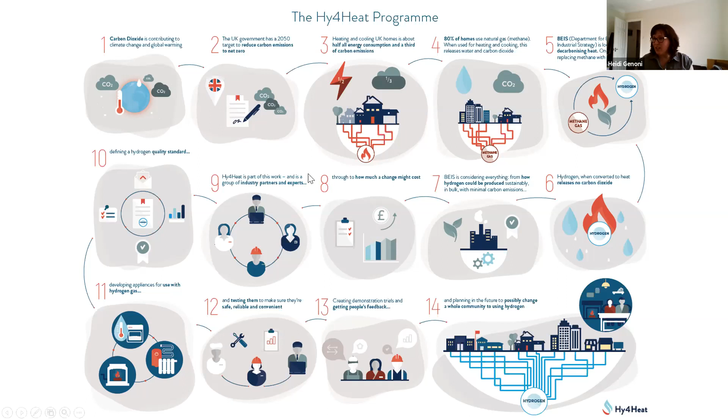So Hy4Heat has a number of different, if I can change onto the next slide. Yeah, so just by way of very brief overview, there's a number of different work packages within the Hy4Heat programme. The programme started in earnest in 2018, and since then we've made fantastic progress with the support of industry. There are a number of different work packages, but to cover the areas broadly, there's development that we're undertaking in terms of developing hydrogen standards.

There's work that's been undertaken in terms of developing all the different appliances that may be needed at end use. And then also, very importantly and critically, is the development of the evidence to support the safety case before we move into demonstrations and then potential future community trials. So just touching on a few of those areas to give you an insight into some of the progress that we've been making. We do have a website for the programme and we provide regular updates, so I would encourage anyone who's not had a look at that, please do have a look.

However, to touch on a few areas, in terms of standards that are being developed, IGEM, which is the Institution of Gas Engineers and Managers, have been developing standards for use with hydrogen, very much building on existing standards that already exist. Likewise, BSI have developed something called PAS 4444, which effectively provides guidance for how hydrogen appliances need to be tested and certified to ensure that they are safe for use in our homes of the future.

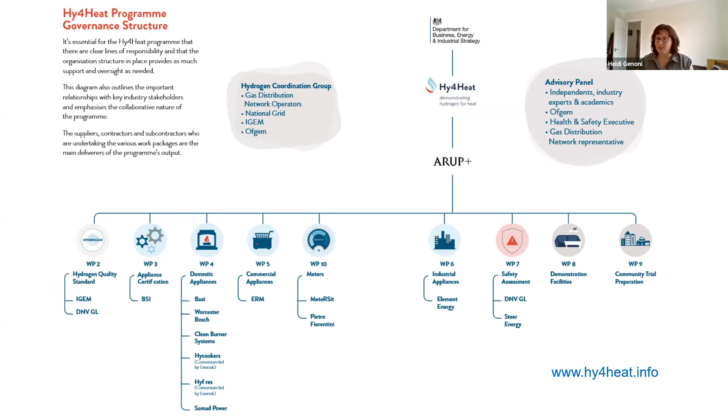So hopefully that's a very brief update, but I thought it would be worthwhile taking recognition of the important role that industry and a number of different organisations have had to play in the whole collaboration approach to make this programme successful. As you can see here, there is a huge number of different organisations working on many different aspects of this programme. And this is all to provide the evidence to be able to move forward with 100% hydrogen in the homes. So hopefully that gives you a brief update of some of the work that's being undertaken in the Hy4Heat programme, and more than happy to answer questions later.

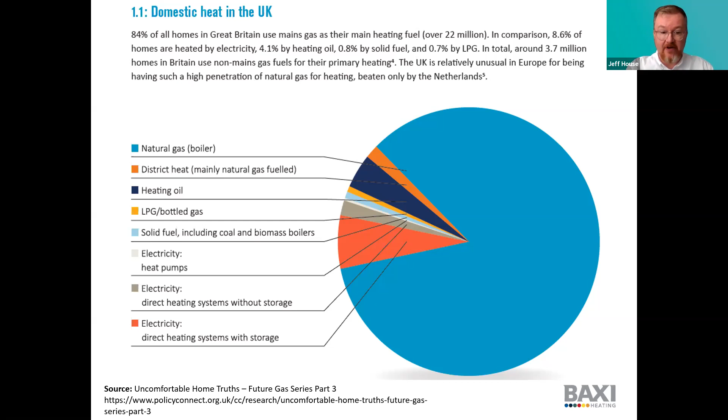So we at group level recognised that hydrogen has a lot of interest from a number of mainly Western and Northern European countries at the moment. The colder climates are more interested in it because you've got a larger market for heat there. And we started to invest in exploratory R&D work to build towards a prototype appliance a few years back now. That's resulted in effectively a world-leading demonstration in the Netherlands that was installed in 2018. We had a working hydrogen boiler installed into a small block of apartments in Rozenburg, which is fueled by green hydrogen on site. There's an electrolysis plant on site, and it really is an encouraging and cutting-edge demonstration of technology.

So in the UK business, we again saw the potential that projects such as H21 from Northern Gas Networks are starting to talk about the potential for mass conversion, and we had other projects from other gas networks in the early stages of development.

So we thought, great, this is potentially something we need to be involved in, and could offer some really innovative ways in which to deploy some of our R&D resource and our work. So the Hy4Heat program came along at exactly the right time. We were thinking about commercializing or bringing this technology across to the UK, and then developing it further to fit the UK market.

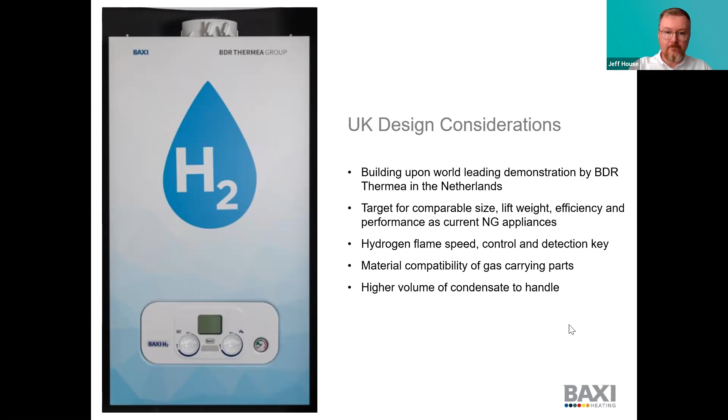So we're at the position now where we have prototype products for the Hy4Heat program ready to go. We were able to meet the design intent, so it is the same size as one of our current natural gas condensing boilers, so it will readily fit into an existing house without any real issues. Weight is always a concern in terms of lift weight and handling. Again, it's very similar, so fairly low weight.

And from a performance point of view, we're hitting the sort of combustion efficiencies and flow temperatures that you would expect. So again, it can be slotted into an existing UK household heating system without having to change radiators or change any of the hydraulics.

Importantly, we have a combination boiler and a system boiler. So the vast majority of UK boiler sales today are combis, so you get heat and hot water from one box. Again, we've got a solution which effectively just replaces that with a hydrogen version. So again, you don't need to find room for a hot water cylinder, which is one of the other drawbacks that we do see with other retrofit alternatives for net zero.

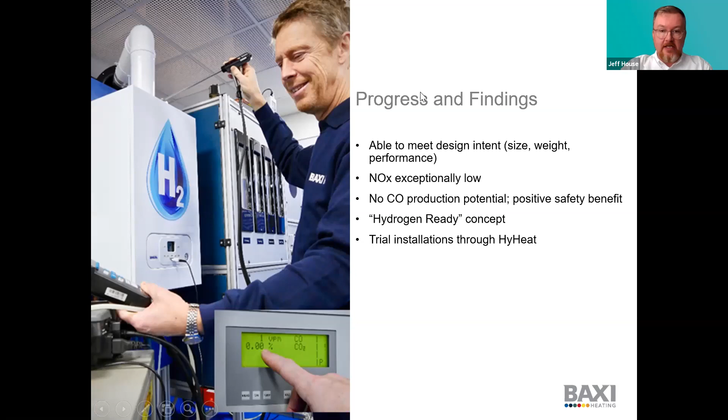And again, Heidi mentioned through Hy4Heat, we're moving into the trial phase fairly shortly. Obviously, to an extent, that's been pegged back by the COVID situation, but we're hopeful we'll see that start to happen fairly quickly now. So that is essentially everything I wanted to run through, Andrew. So happy to move through to Q&A.

Thanks very much, Jeff. Well, thanks to everybody. There are a few questions coming up because I think people are fascinated to know the whole production process and the schedule. So questions around that. So feel free, whichever one of you wants to answer this when I throw them all out.

Here we go. A few questions about the renewability. Is the way that you're going to produce the hydrogen renewable? There's a few worries about that, and also the amount of energy that it might take to produce hydrogen. I guess there's no fixed actual production strategy yet, is there? It's just looking at several at the moment. Yeah. So go on, Heidi, you go first. Okay.

So from that, I mean, people are entirely right. There's two main ways that hydrogen can be developed at the moment. It's either blue hydrogen, which is effectively using fossil fuels and carbon capture and storage to capture the carbon and put it back in the ground, or there is green hydrogen, which is effectively using renewable energies and electrolyzers and water to create the hydrogen.

Obviously, there's a preference towards green hydrogen, and I think there's big moves in the industry that that will be the end state that the energy system is aiming for. But there's got to be recognition that there's a cost associated with green hydrogen at this moment in time. Not to say that that won't change in the future. So at this moment in time, it's considered that blue hydrogen is possibly cheaper.

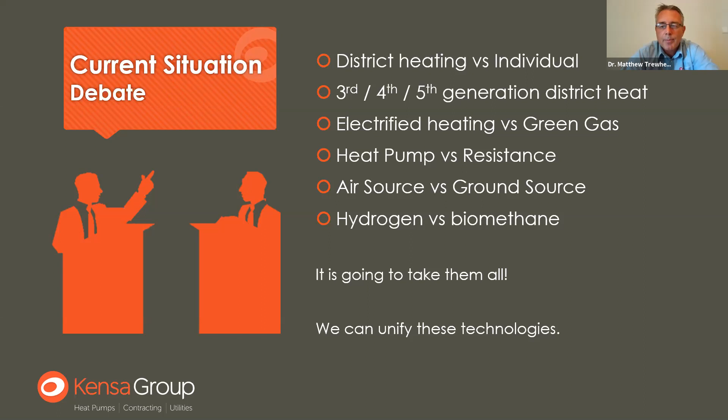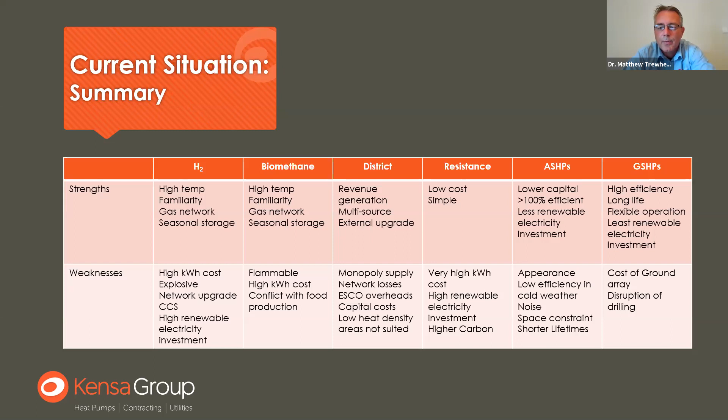One thing we'd contend is you are going to need all of it in some way, shape or form. We're going to look at a possible way that most or all of these technologies can actually be unified into one concept. So the concept we'd like to introduce and chat about is - that's a quick summary of the arguments. Please don't take this as a comprehensive list of all the arguments for strengths and weaknesses. I'm sure everybody listening will disagree with at least one of those, and if I'm honest, I don't agree with all of them either, but that's a flavour of the types of arguments, debates that are going on right now.

If we just look at hydrogen and ground source, for instance, to get it relevant to what we're going to talk about in a moment. Ground source is excellent at making the best of electricity generating sources, in particular renewable electricity. So for every unit of renewable electricity that's produced, you get to leverage another 2 or 3 units of heat out of the ground, so that you really maximize all of that efficiency and therefore lower the cost, both for building the electricity generating capability and for the cost of purchasing it.

Hydrogen, you don't get quite as much bang for your buck if you decide to make your hydrogen using renewable electricity. By the time you've created it, stored it, transported it, and then burnt it in a boiler, you get 50 to 60% of the energy. So in that sense, it's less efficient. On the plus side, it's very, very flexible. Once you've created it, you can store it, leave it there, and decide to use it whenever and wherever you like. So it's very flexible in that regard. And the system we're going to look at now combines the best of both of those things.

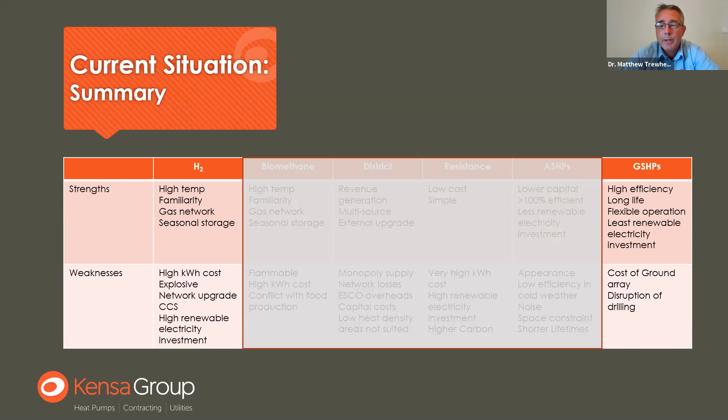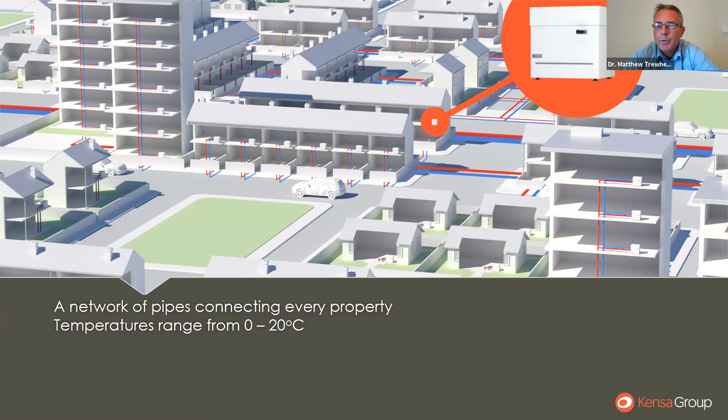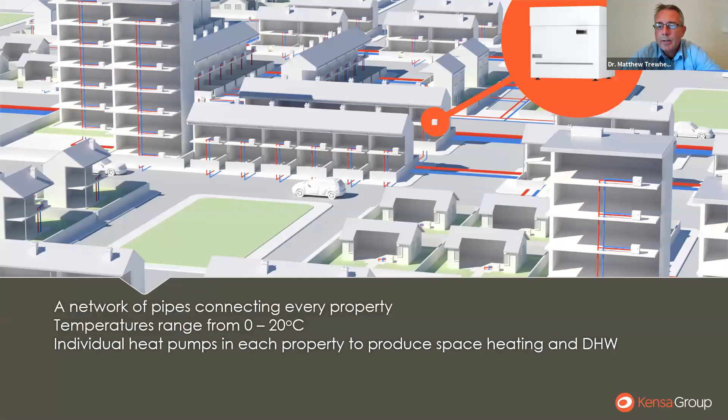So the foundation for this is a type of district heating. It's called an ambient temperature network, for heating and cooling. What that looks like is a series of pipes running around your district, town, or city streets, connecting every property together, and that circulates a working fluid that ranges between 0 and 20 Celsius. The ambient temperature is similar to the ground that it's circulating in. You then have a heat pump in each property that either upgrades that energy to produce space heating and domestic hot water, or chills it down to produce cooling.

And you can take passive and active cooling from the same network. So there are some cooling applications where the network's already at the right temperature and you can use it directly without a heat pump. For more intensive operations, you use a heat pump, take the cold out of it, and put the heat back in. The nice thing about this sort of network is all the waste products - when you're making heat from the network, your waste product is cold, and when you're producing cooling, your waste product is heat - go back into the network and recirculate it around to act as a source for the other devices.

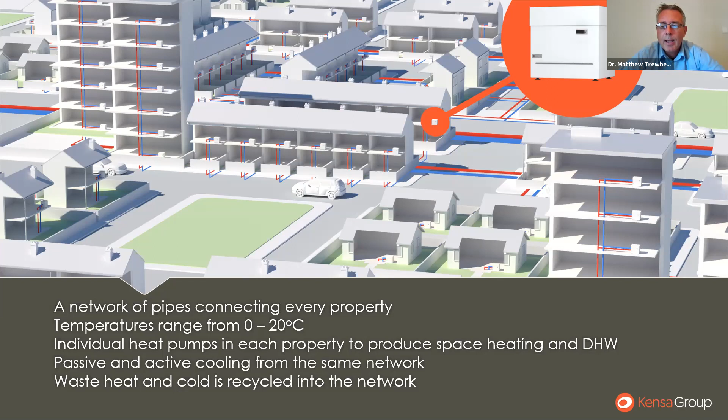In theory, if you had a perfect world with perfectly balanced heating and cooling needs, that's all you'd need. In practice, they never balance, and even if they balance in a year, you need them at different times of year. So you then have a mechanism for bringing your temperature back to ambient, either because you've put too much heat into it for your cooling loads and need to bring it back down again, or you've taken too much heat out of it and need to recharge the temperature.

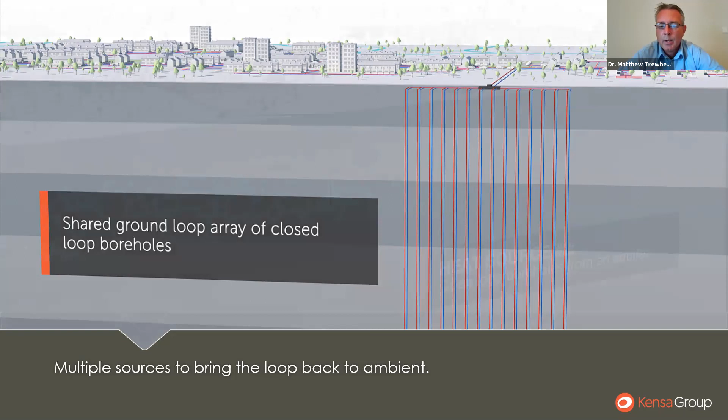The most common of these is a shared ground loop array, which is a series of vertical boreholes connected together that extract either heat or cool from the bedrock to bring that temperature back. The bedrock in the UK sits around 10 or 12 Celsius, so it's right in the middle of our 0 to 20 Celsius ambient loop. So whatever you've done to it, made it warmer or cooler, your closed loop boreholes can bring it back to that ambient. Other ways you can do that, you can access water that's stored underneath the ground in aquifers.

We've just completed a project in Sunderland doing this for heating 7 tower blocks, and that's with Gentoo heating and energy. A lot of our cities, luckily enough, have nice water supplies underneath them, and particularly anywhere you find a brewery, you'll find a great aquifer.

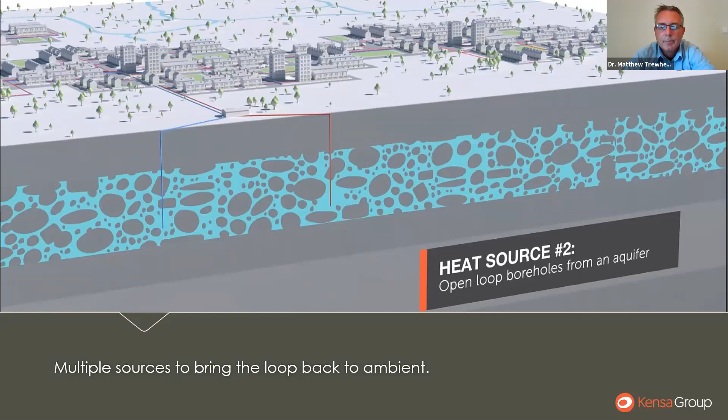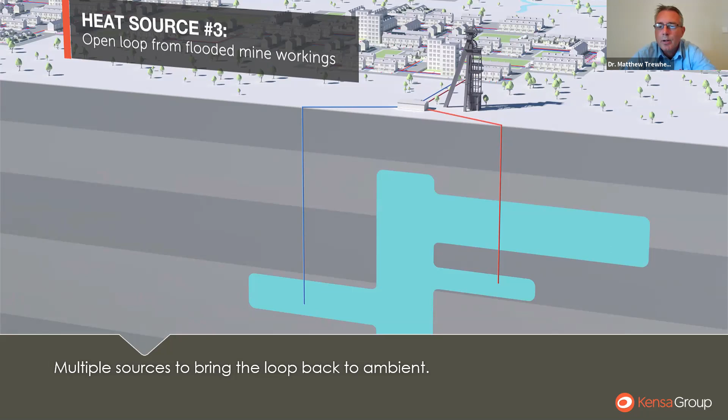You can take heat or cool from flooded mine workings. At first glance, that seems a little bit niche, but then when you realise that 28% of UK properties sit above coal workings, you realise that it's got a lot more potential than some people think.

And you can take heat from surface water, so whether you're lucky enough to live next to the sea, a river or a lake, you can use that as an energy source, again, either for heat or cool.

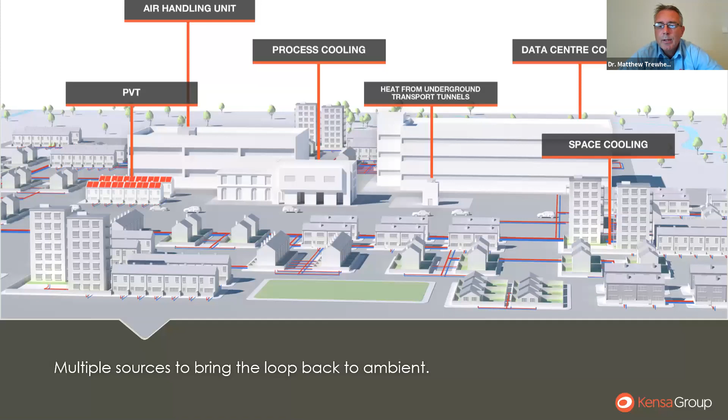Running at ambient temperatures allows you to take best advantage of all sorts of sources of waste heat, whether that's underground stations, cooling a data center or a supermarket, or even a project we're working on, cooling PV panels to improve their efficiency and take the excess heat into the network to reduce the amount of electrical energy that heat pumps need, improving efficiency and reducing the strain on the grid.

How this ties in with the electricity grid: heat pumps are powered from the general electric supply, and we recommend that they're fitted behind the meter. In other words, if somebody wants to crank the thermostat right up and have their building really warm, they'll increase their electricity supply for the heat pump running and taking heat from that ambient temperature loop.

You can also install smart controls, and we're working on these projects to automatically load shift to times when the grid can most accommodate it. This helps balance the grid, but also, electricity is cheaper at those times, so it reduces the running cost to the occupants.

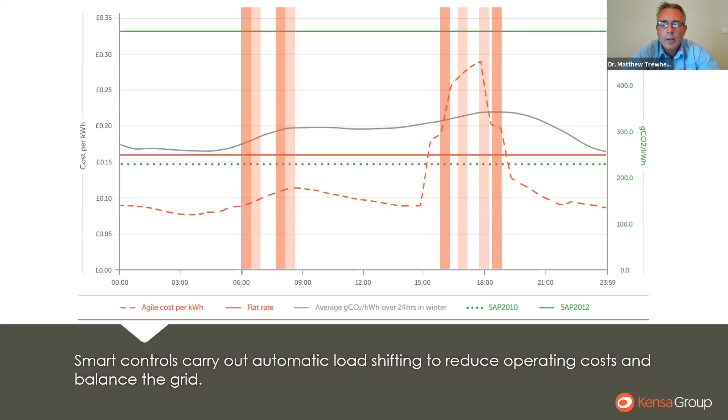You can do that over timescales of an hour or two, just using the fabric of the building, but installing some local thermal storage - which could be water, but more likely phase change heat batteries, the sunamp type approach - you can store for 24 to 48 hours. So you can use that renewable electricity, even though the generation is variable and your demand is varying, you can handle that on those sort of timescales.

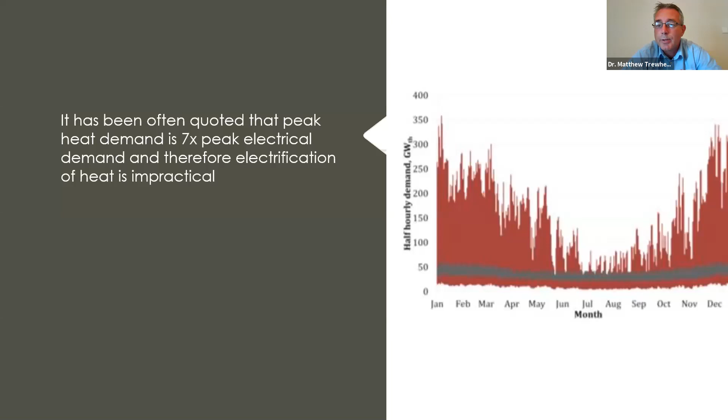A lot of people will say that it is impossible to electrify heat, in inverted commas, because the demand for heat, as shown in the red line on that graph, is many times larger than the peak electric supply.

But there are other ways to analyse that, and Watson et al. have redone those calculations - you then add in the efficiency of the heat pump, and then also add in automated load shifting and smart controls. What you'll find is we'll need to add around 60 to 80% of the current peak electricity supply to power all of these heat pumps. Now that's a fair challenge, but it's nowhere near as difficult as a lot of people think it is. We think it's perfectly possible to do.

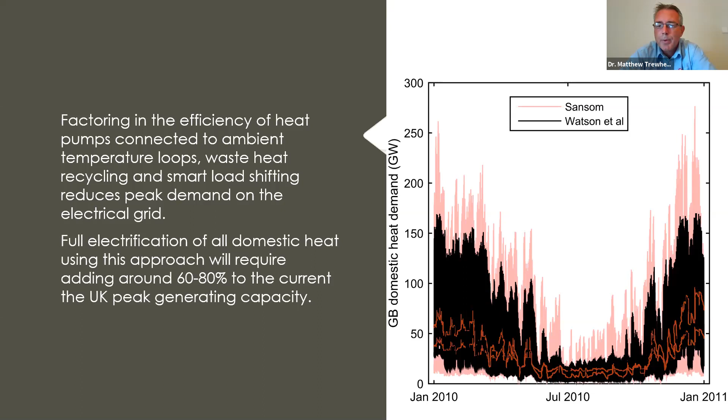And then if you integrate smart charging of things like electric vehicles with the smart control of the heat pump, so you've got the whole system understanding of what energy is going and where, then you can get even further local grid balancing.

Finally, there are going to be times when the renewable generation or electricity generation isn't going to be able to keep up with the demand on the grid. As we just heard earlier, you can turn hydrogen into electricity, either with a CHP unit or with a fuel cell. If you prefer green gas, biogas, you can convert that to electricity using a CHP machine again.

Our concept is that high value hydrogen that we've produced - the best time to use that is when you really need it, and you can boost the electricity supply into your local area by converting that hydrogen into energy. One thing that happens when you do that is you produce waste heat, and with our concept, that waste heat is also picked up and put into the local area grid, so that feeds energy into the ambient loop, and that has the lovely benefit that you reduce the demand on the grid. Either heat pumps need less energy because they're running at a warmer temperature, at the same time as you're feeding energy into the grid, and you get a nice double benefit there.

How should we do this and where? Our contention, our concept, is you draw up a list in the country of where to start, and that could be based on several factors, including which areas have the best geology, who has the worst air pollution.

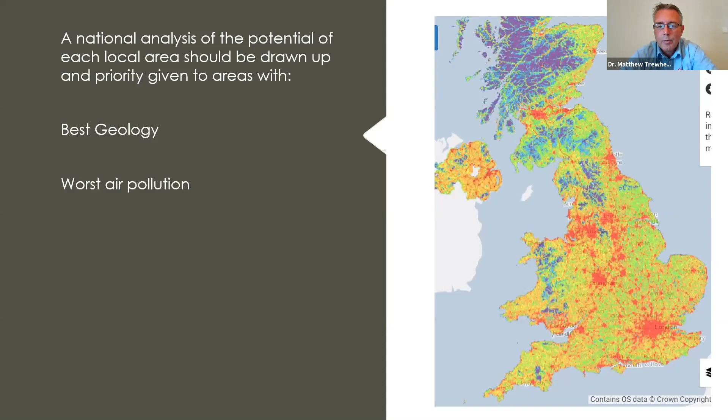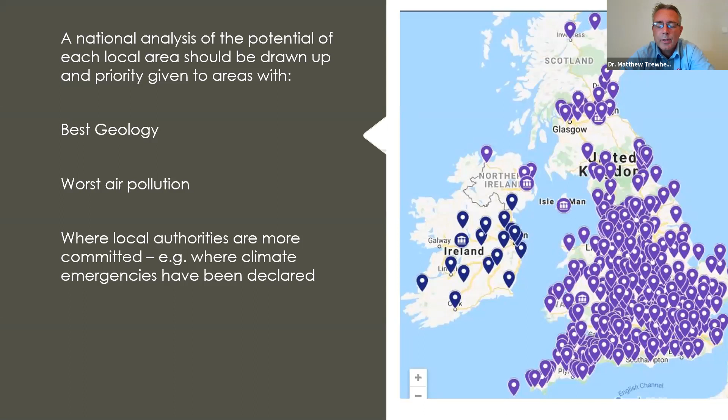If you decarbonise both heating and transport, you also solve the air quality issues. Air quality is mostly dominated by transport, but a fair fraction is from heating as well. So we think you should start in areas with the worst air pollution right now, and also where local authorities are more committed - if they've declared climate emergencies with net zero targets earlier than the national 2050 target, that would be a good place to start rolling these out.

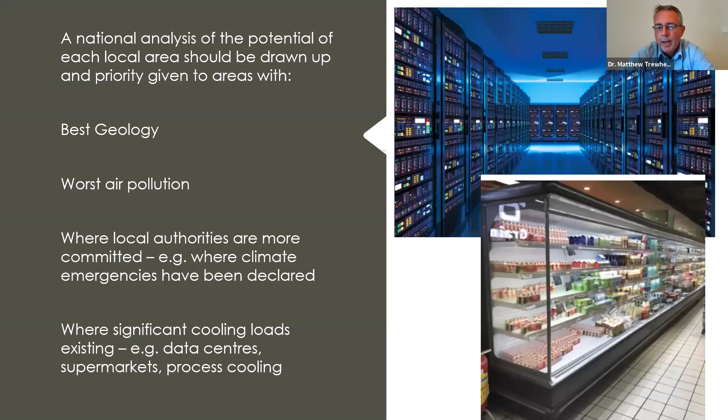And then lastly, where you've got significant cooling demand. If you've got a data center, a supermarket, or process cooling, you can reduce the capital cost of putting the network in, because you don't need so many boreholes to recharge the network. You can also increase the efficiency of the heat pumps because they're starting with a warmer temperature.

How much will all this cost? Quite a wide range there, between 8 and 30 billion pounds per year, to decarbonise 100% of heating in domestic properties by 2050. That depends a little on when you start and how much advantage you can take of the different sources of waste heat.

Compare that to our overall government spending last year from the Office for Budget Responsibility - we spent £40 billion on servicing debt. The amount to fully decarbonise heat using this method would be between 1 and 3%. It's also interesting to note that air quality issues alone are estimated to cost the UK economy £20 billion per year.

My background's astronomy and astrophysics, and I'm used to jumping from really tiny numbers to really big numbers and back again. But even when I see 8 to 30 billion pounds a year, it seems like a big number. When you put it in context, though, it's not ridiculous to completely decarbonise every single property in the UK.

In summary, we have the technology available right now, and we could combine the best features of various types of renewable generation, smart control, heat pumps, and hydrogen into an integrated system that will take us on into the 21st century.

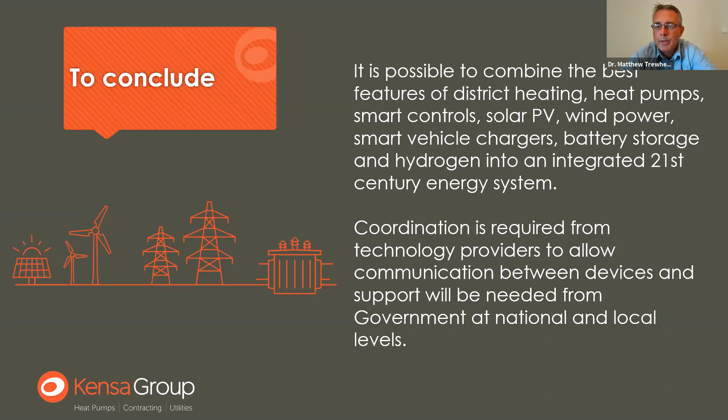So that's the idea and the concept, and that's one way we think we can make big progress towards our net zero 2050 targets. Thank you.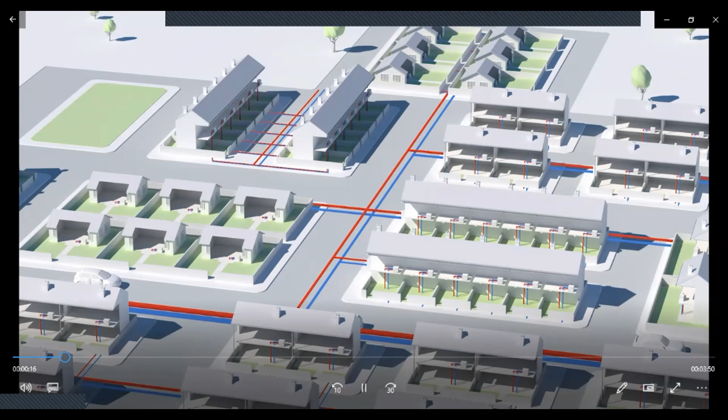The foundation for this vision is a type of district heating called an ambient temperature loop. This consists of a series of pipes in the ground that deliver a working fluid, typically between 0 and 20 Celsius, to every property, domestic and commercial.

Connected to this network are heat pumps that upgrade the temperature needed for heating purposes and hot water, and downgrade it, chill it, for air conditioning and cooling purposes. All of the waste heat produced by cooling goes back into the ambient temperature loop, and all of the cold produced as a byproduct of heating for homes and hot water also goes into the loop. That allows you to recycle the energy rather than waste it out to atmosphere.

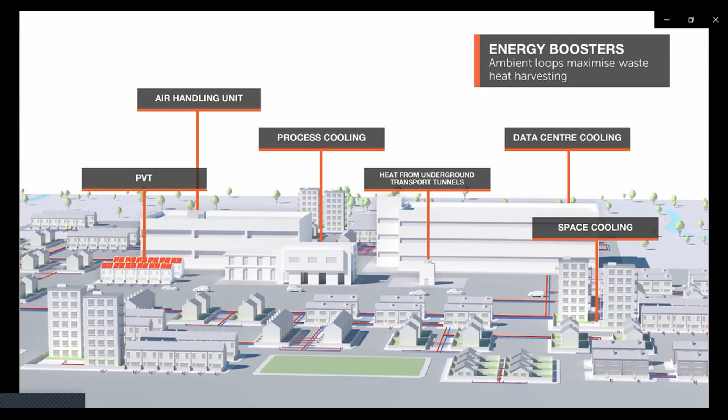The efficiencies of both systems, heating and cooling, are improved, and you can also store energy in this loop between heating and cooling applications. In theory, the ambient temperature loop could provide all of the heating and all of the cooling demands, but that's only true if the heating and cooling demands are balanced to each other.

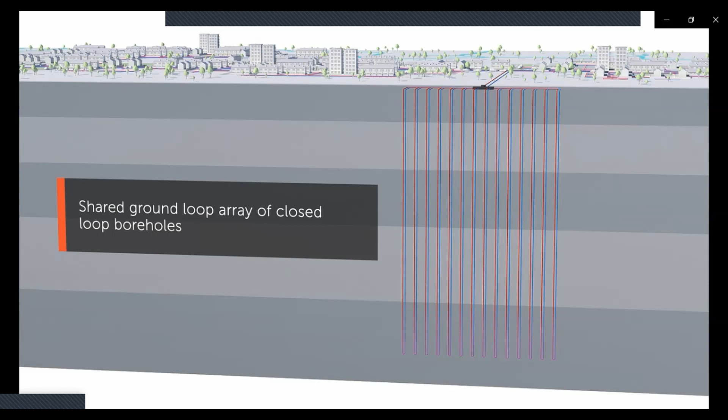Often they're not in the real world, and particularly cooling is required a lot more in the summer and heating is required a lot more in the winter. So to balance these two effects and spread out the seasonality, we use something called a shared ground loop array, which is a series of boreholes buried into the ground, anything from 100 to 250 meters deep, that recharge either heat or cold into that ambient network loop and keep it at that nice stable midpoint of temperature that you can then extract heating and cooling from.

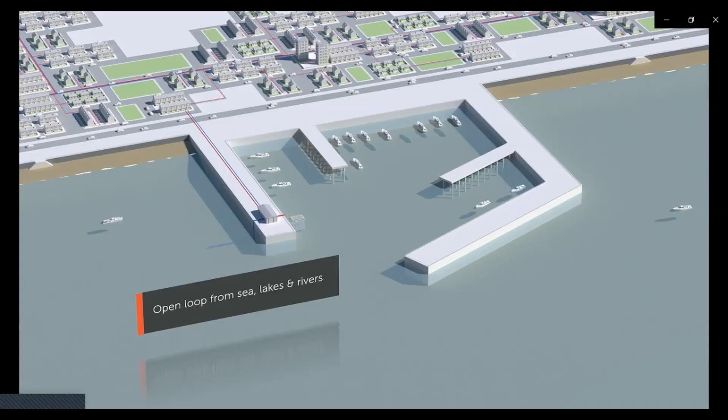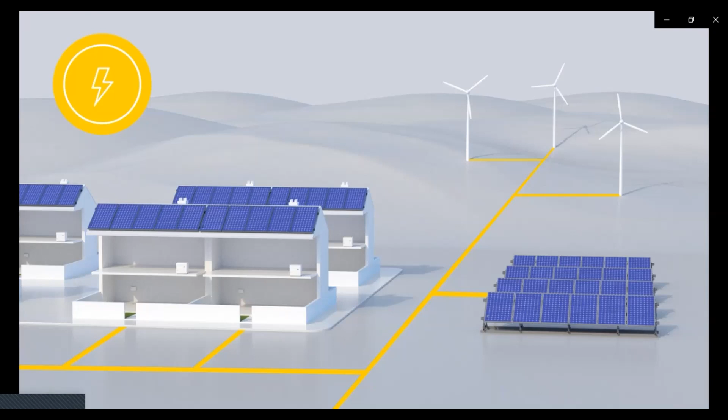Other ways to recharge heat or cold into this ambient temperature loop are aquifers, that's water stored underneath the ground, surface water like the sea, lakes or rivers, mine water, or waste heat such as cooling the underground stations or data centres. The heat pumps are powered by electricity, and this will undoubtedly mean more investment in low carbon electricity generation for our grid, things like PV and wind in particular, but potentially also nuclear, tidal and hydropower.

These electricity power sources are more intermittent, and our heat pump controls will be smart enough to account for this, turning heat pumps up when electricity is plentiful and moving it to times when the grid can most accommodate it. We'll also combine with local storage, so storing heat in properties, ready to provide heating and hot water when required, generating and recharging that heat when electricity is most plentiful, when the grid can most support it.

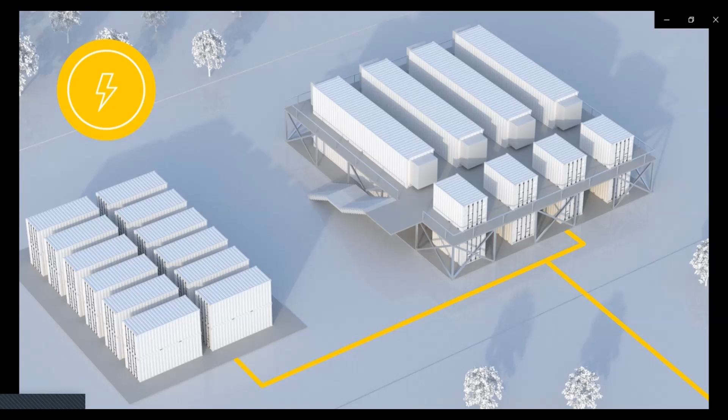We see integrating these controls with a similar control mechanism for electric vehicles. So vehicles are charging at the same time as the grid can accommodate it best, and all of these systems are working in synchrony with each other. To help with this, we see grid-connected batteries, probably large centralised batteries, helping to stabilise the grid and to smooth out the intermittent nature of the generation and the demand.

We also see a role for hydrogen. One of the ways you could do it with an ambient temperature loop is you could connect a hydrogen-powered fuel cell. So when the local grid comes under strain, the fuel cell fires up, delivers electricity into the grid. Also, the waste heat that comes out of the fuel cell is delivered into the ambient temperature loop, which improves the efficiency of the heat pumps, reduces the electrical demand at the same time as the fuel cells are inputting electricity into the grid.

Some interesting sound editing at the end there, faded out with a jump cut.

So without further ado, we move from ground source heat pump technology to a wider discussion of the technology around heat pumps. And I am delighted to be joined by three experts in the heat pump field. We've got Graham Wright, we've got John Felgate, and we've got Dave Pearson. Now, each of them noted for their ability to speak, sometimes at length, on the subject of the technology, but it's the experts you want to hear from. So what I'm going to do is ask them in turn, a bit like with the hydrogen one, to delve into their area of expertise. And the only thing I haven't done is told them who's going to go first.